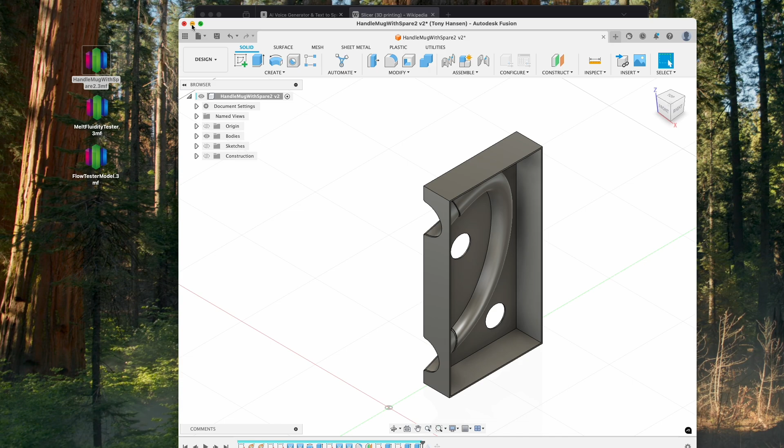This is a 3MF format file of a case mold for a handle. It was created by CAD design software Fusion 360. The 3MF format has many advantages over traditional STL files.

I'll open this one in Simplify 3D. It is a paid special purpose slicer. Like others that come free with 3D printer hardware, it can rotate, zoom and pan using the mouse, and it can dissect, combine and resize objects. Here is an example of how it can duplicate and reflect an object.

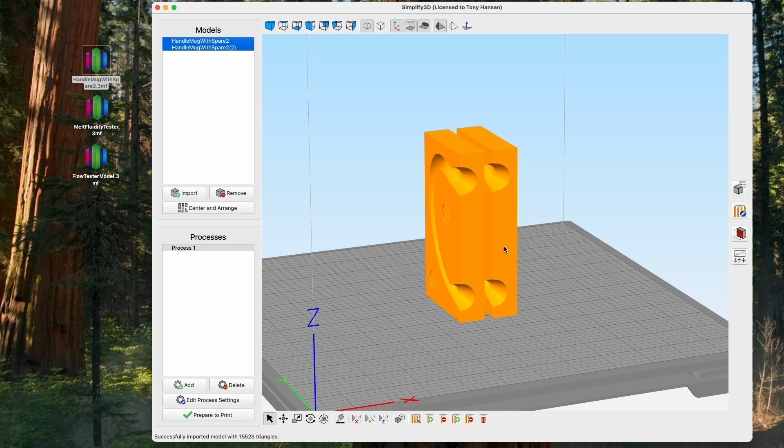If you use this slicer, you likely won't need any further instruction. Let's use PrusaSlicer to open the 3D model of a melt fluidity tester that I have downloaded.

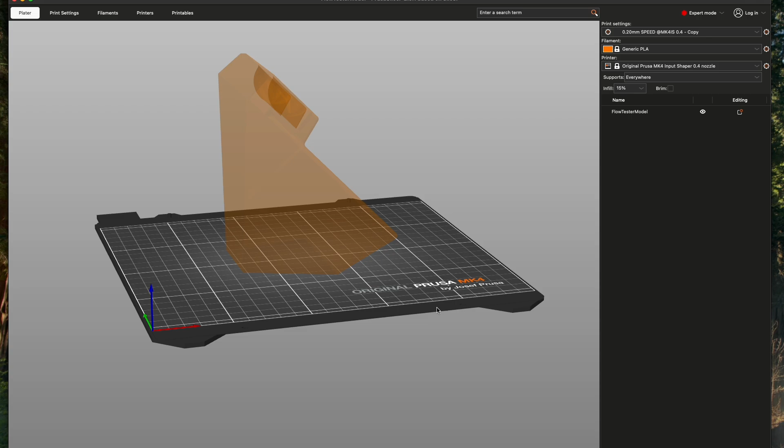There are some details to be careful about. First, I'll make sure support is turned on, and the overhang threshold is set to 35 degrees. Printers these days can handle extreme overhangs. Now let's go to Preview. Support is being generated in front, even though this was drawn with a 37-degree angle to avoid it.

Second, there is a problem at the back. It is not sitting flat on the bed. In Editor mode, I'll use the Place on Face tool to fix that. Now, let's go back to Preview to reslice it.

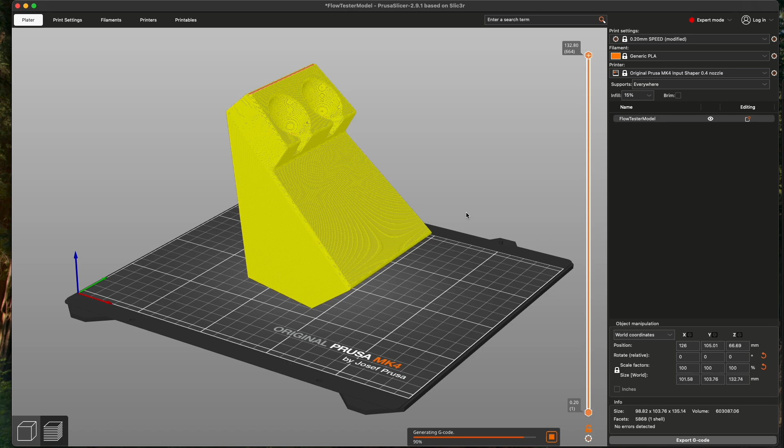That has fixed both issues. Back in Edit mode, I'll press Escape to turn off the Placer tool.

Third, let's go to Preview mode and move this slider. Notice that infill is being generated, but it is not needed. Let's turn it off in the print settings by changing the fill density to 0. After reslicing, it is hollow and ready to print too.

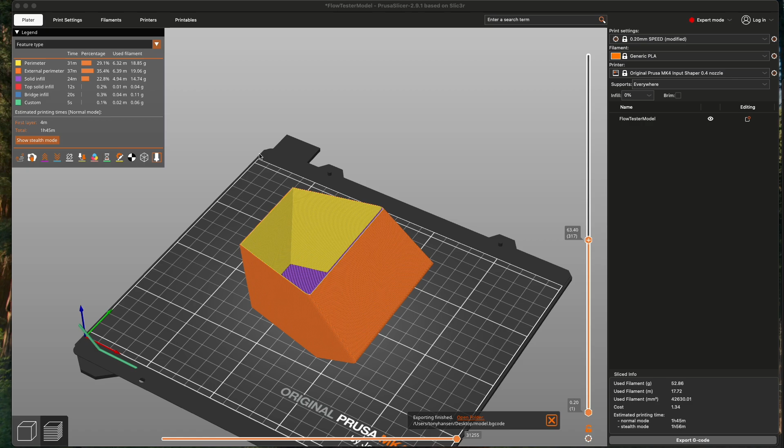After making sure I have the right printer configuration selected, I'll choose Export from the File menu. Using the Export G-code option, I'll give the file a name and save.

There are many ways to send this to the printer. The most basic is to copy the file to a memory stick and insert that into the printer. Later, you can learn to use your slicer's ability to connect to your printer directly over Wi-Fi.

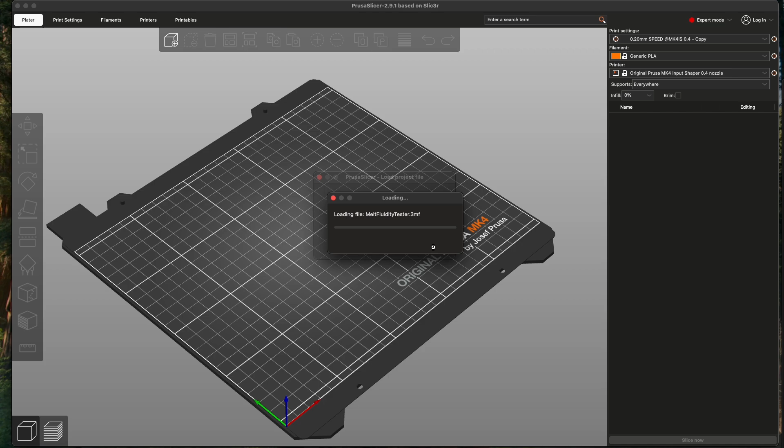Now let's open a file that contains multiple objects. Notice it asks me how I want to open it. I'll tell it I want the 3D models. Then it asks if I want to load all the objects as one. I'll answer no. I obviously cannot print all of these at once.

To unselect all in this slicer, I shift-click outside of them. Now I can proceed as before, positioning each object on the bed, orienting it and configuring the infill and support.

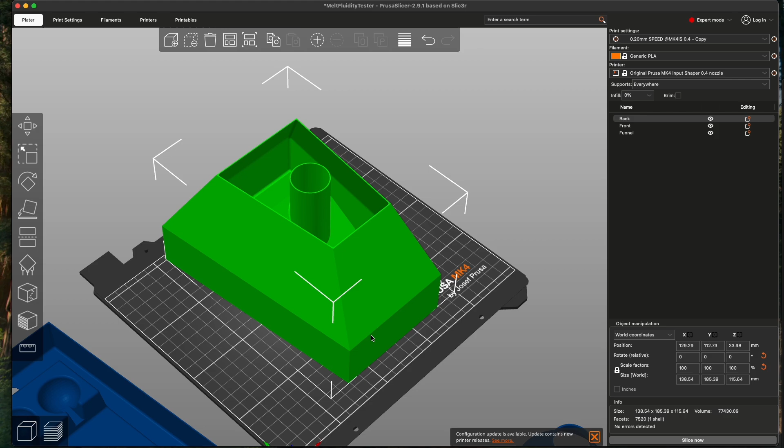This object is hollow and open, with no extreme overhangs. So the slicer realizes that it does not need to print support. However, there are a couple of new issues with the other two.

For example, look under this object. Notice it does need support. I'll move it to the print bed and go to Preview mode to ensure the slicer does realize this need.

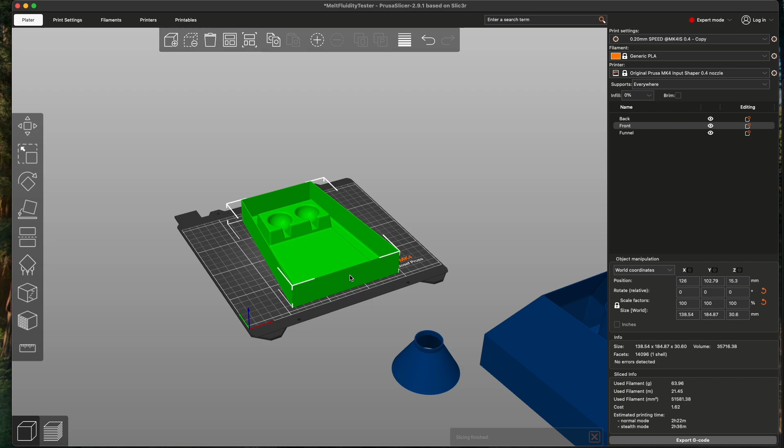This object has a special need, a brim. That is because its area of contact with the print bed is inadequate. It could release during printing. I'll set a brim at 3 mm wide outside and enter a 0 separation gap to make sure it holds on well.

The preview ensures that it is working.

Other popular printer brands have their own slicers. This is Creality Print. Its Prepare panel corresponds to the Prusa Editor panel. It also has a Lay on Face tool.

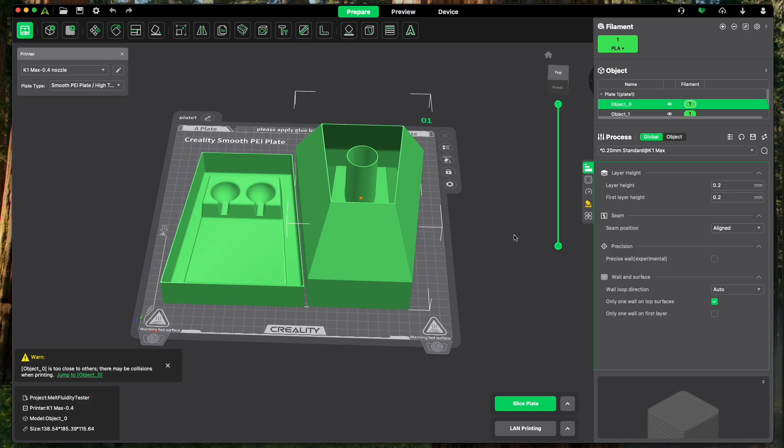Rotating and panning have different mouse key combinations than PrusaSlicer. The controls we already talked about are here on the right. Support Panel 4 has the checkbox to enable and disable support. Strength Panel 2 is where you find infill settings. Other Settings Panel 5 under Bed Adhesion is where you choose the brim type.

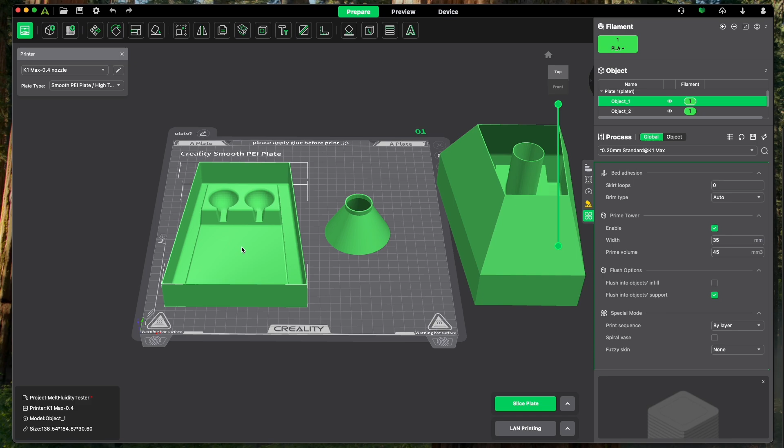This slicer enables these settings to be global or just for the selected object. For example, I can print these two at the same time, turning on a brim for this one, but not this one. While this slicer can export to a G-code file, its device panel can be used to connect a printer, initiate a print, and monitor it with data and camera.

Most other systems have similar functionality.

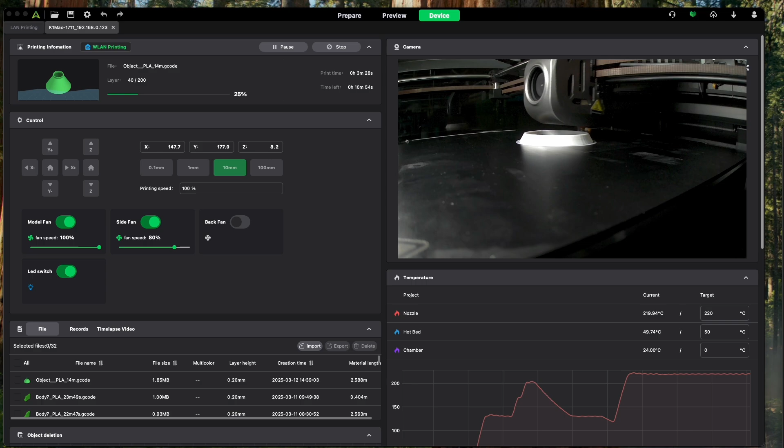Our wish is that this video has removed a few barriers that might have been preventing you from investigating the use of 3D design and printing in your ceramic practice. Don't miss out on the potential by being overwhelmed. Just take it a step at a time, solving each obstacle in your path as it arises.